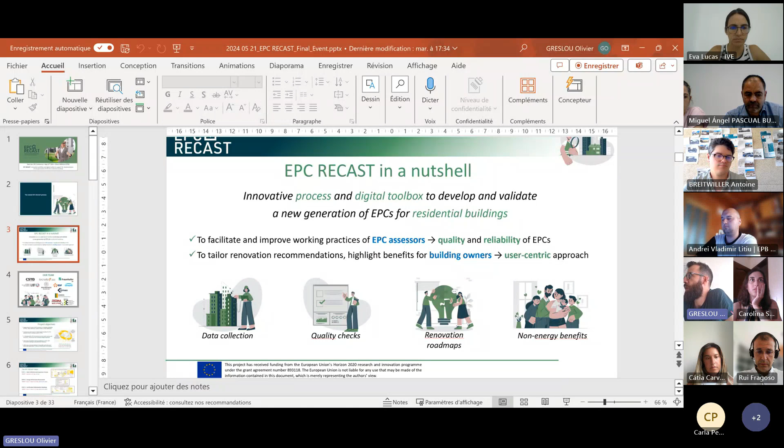Just to say that we were 11 partners. Some of them, I guess you know them. So we were with Tecnalia, Fraunhofer, energy companies in France, EDF&G, Polimi in Italy, Research Center List in Luxembourg. And we had EPB Center with Jana attending today, REHVA with Andrei, R2M, and BIMEO, a French company that developed a tool to do on-site visits of buildings.

So the project objective was to use novel methods like data collection and quality checks to improve the first step of the approach, which is the data collection on site. Second step, you have the energy performance assessment with the energy simulation back at the office, and then the certification where you issue the EPC and provide it to the owner. The idea was that the approach should last around 1 day as a maximum, with half a day of on-site work and then the other half day back at the office.

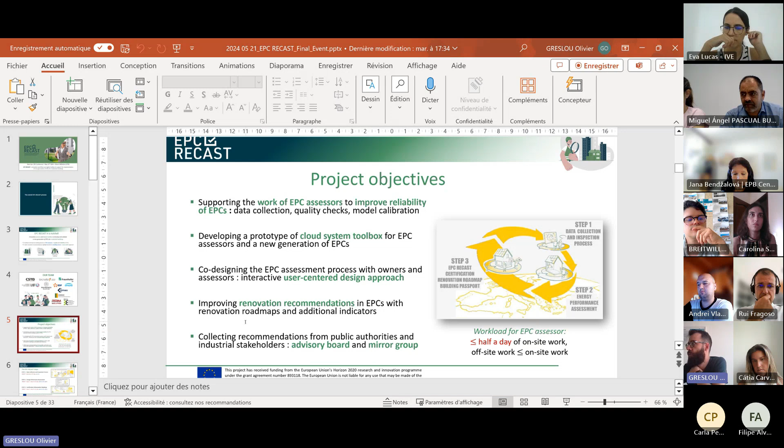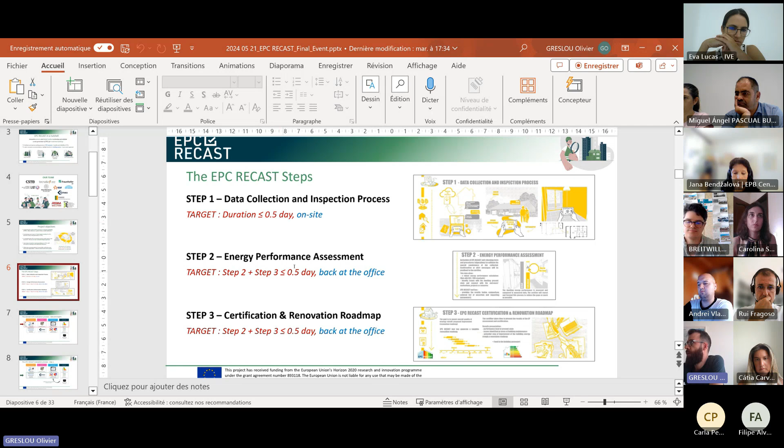So with the cloud system toolbox, I already said all of these things, and we had feedback from public authorities from different countries with the advisory board and the industry with the mirror group. So just to recall again the 3 steps. First one, data collection and inspection process, and then energy performance assessment, and certification and renovation roadmap.

So if I try to present the core process, what we did first on site was to use a tool developed on an iPad, on a tablet, that you use to scan the building. So I have several pictures of that here. So you detect the different walls inside the dwelling. Then it cross-checks the plans that it has detected, and it generates a BIM model of the building that you can see here. And you can then generate blueprints of each floor. So it can be used to get the right geometry of a dwelling from the inside.

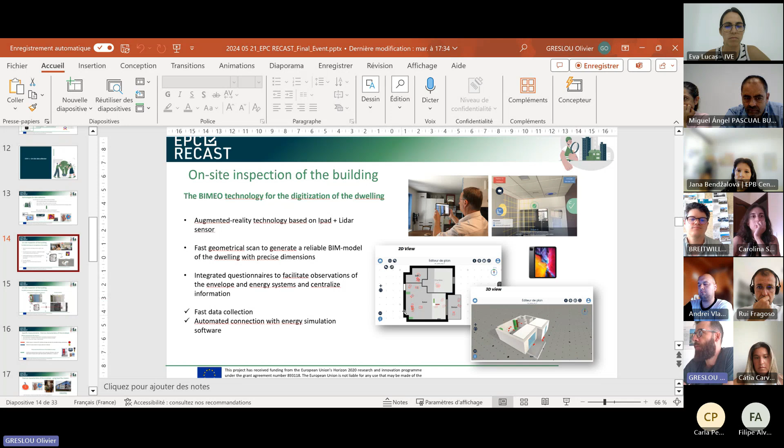You cannot scan a whole building with that, so it's not for multifamily buildings or non-residential buildings. It's just for single-family houses or flats inside multifamily buildings. But still, it helps to streamline the process and spend less time. You can also take pictures, annotate the blueprints you have in the app, answer questionnaires inside the app, so that you centralize all the data collection and observations about the building inside the same software and the same digital project.

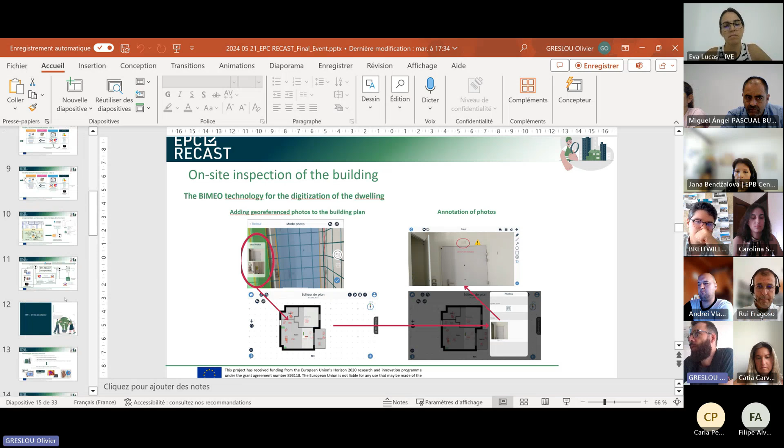We did other things, but I will not present them, like on-site measurements of thermal characteristics of the walls. The key central point is that once you have collected this information, it's stored into a simple digital logbook, which is based on a French technology developed by CSTB, the Kroqi technology, a platform where you can manage files and integrate different web services. But at the heart of this, you have an XML data model. So it's like an HTML file, which Antoine will present, which specifies all the information you have identified about all the building components, so the walls, the windows, the heating, HVAC systems, etc.

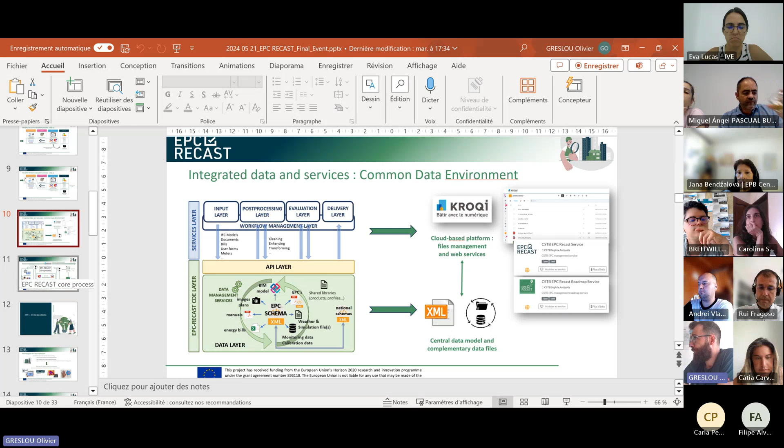In theory, this file could be connected to many things, to images, to bills, to databases, etc. We have not integrated all the connections in EPC RECAST, but that's something we are able to do at CSTB and that we could do in other contexts. So the data model is really at the heart of the project. And then, as you can see with the arrow, you store the information in this file. Then it's used, in some cases, for a model calibration. It was done by our colleagues at Tecnalia in Spain with EnergyPlus to evaluate some input parameters.

And then we developed a process that allows you to do dynamic energy simulation with a simulation engine that was developed at CSTB for new buildings.

Sorry, I just hear some background conversation.

Okay. So here is the process in more details. On the left side, you have the scans and measurements I talked about. So it's stored then in the end in this XML file, which is stored then on this web-based toolbox, which is a simple digital logbook.

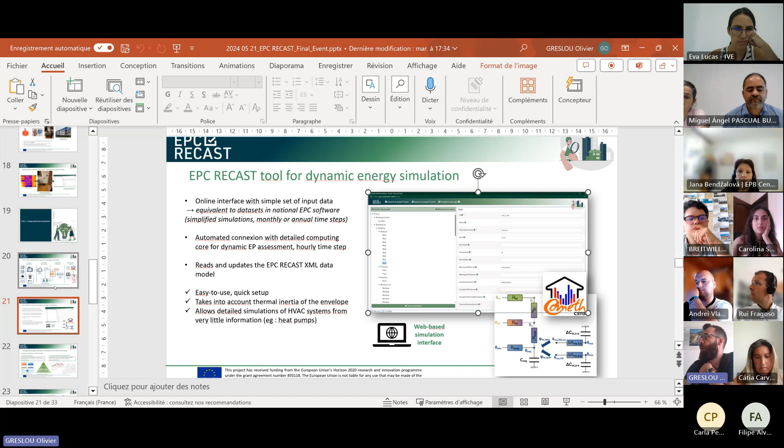And then we developed a simulation interface, which looks like that. It's close to an EPC software. It was just developed for the purpose of the project. We are not software providers at CSTB. It was just to do the test. And then you have conversion algorithms which convert this data set, which corresponds to what you're requesting today to an EPC assessor, into a more detailed data set that allows you to run a more detailed dynamic energy simulation.

So the point is that normally you do dynamic energy simulation with an engine like TRNSYS, EnergyPlus, COMETH, and other tools; it's rather for energy consultancy companies because it takes more time. You need to have better training to do that. And an EPC assessor is not trained enough to do dynamic simulation. So he has to collect the same amount of data as today, but then we do the conversion to transform this data set into a more complex one and to run the dynamic energy simulation.

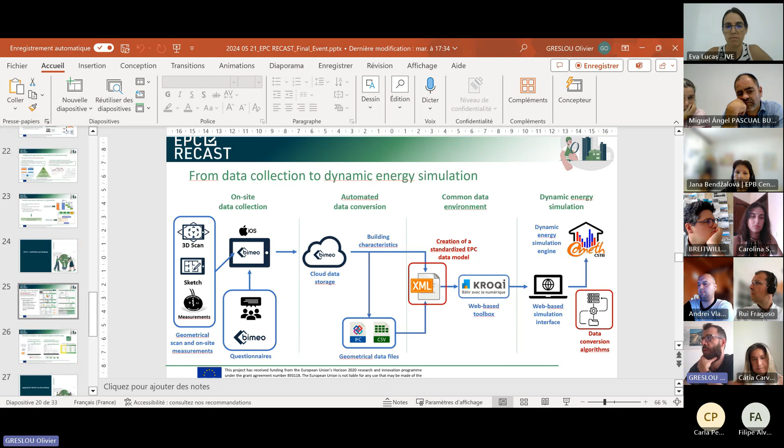And that's also connected closely to this data model, which is the entry point. And then we store the results from the dynamic energy simulation inside the data model. So that's what we did there, and it allows in the end to fill in an EPC template that was developed by Jana, who is today with us, which was closely related to the revision of the EPBD. So we monitored the evolution of the EPBD to define KPIs and information we should have as a minimum in this template. So this is how we did the process.

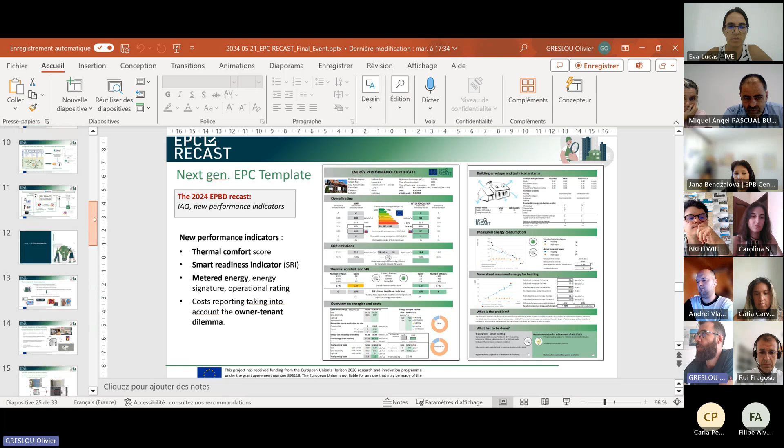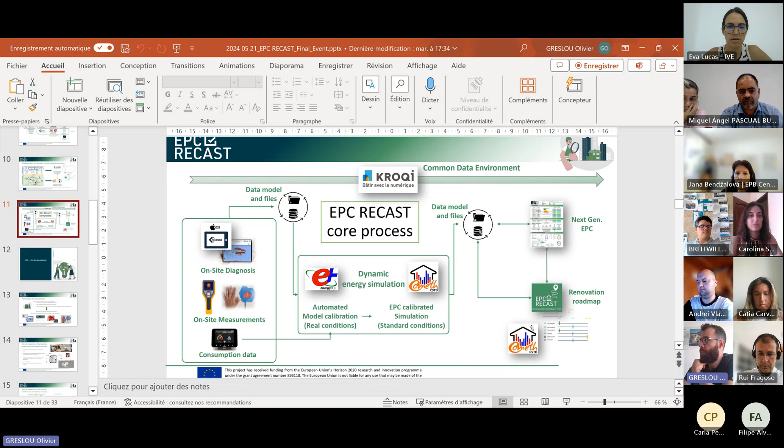So just to close on EPC RECAST. So in the end, you do the energy simulation, you store again the results into the data model, and from that you are able to have your next generation EPC. And we also implemented a renovation roadmap tool, a simple one that makes simplified renovation scenarios, which is also based on the data model of the building. So you read the data model, you have the current state of the building, then you define your renovation scenarios, you do the simulations, and you get the roadmap in the end.

So what we demonstrated in the project is that it was feasible to have an integrative digital workflow to improve the daily practices of EPC assessors with a common data model and a set of digital services. We proved it was possible to make interoperable different reporting and regulatory tools like renovation roadmaps, passports, EPCs, and other tools like national databases, even though we did not implement that, thanks to a common data model of the building.

So just to move to the final thing: to have an implementation in national markets, we do need IT development strategies from software providers who would provide such tools and digital workflows with professional software and interfaces to professionals. And we need data standardization of these data ecosystems and data models at the national scale and European scale to facilitate the development of tools that could better cooperate between themselves.

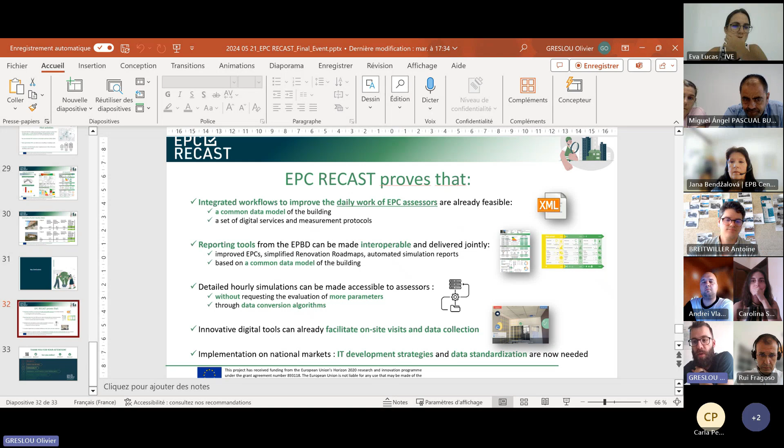So that was about EPC RECAST, but then I let Antoine share his screen and present elements about the French national database. Do you see my screen correctly?

Yes. Okay. So I will present you the French National Building Database, which is an initiative by CSTB to gather all information we have on buildings in a single IT object.

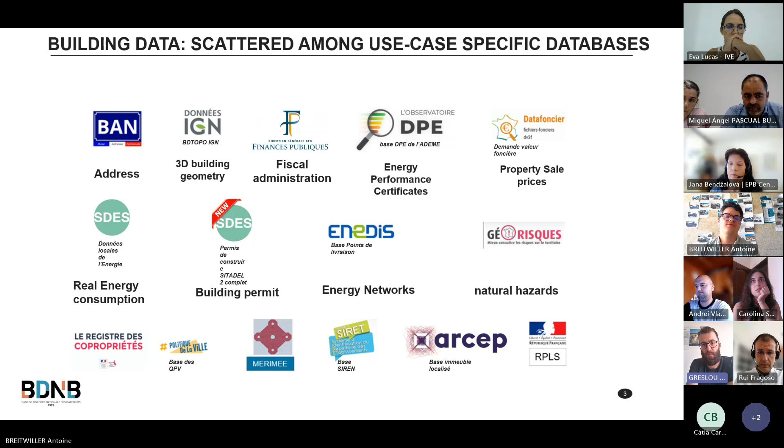So first, the state of building data in France before this was that we had a lot of building data, but they were scattered among use-case-specific databases. We had the fiscal administration with a lot of information on buildings. We had 3D building geometry. We had a lot of information on building permits, real energy consumption of buildings, but all this information was produced by different organisms, and they were not interoperable, which was the main difficulty to be able to do analysis of buildings on multiple indicators.

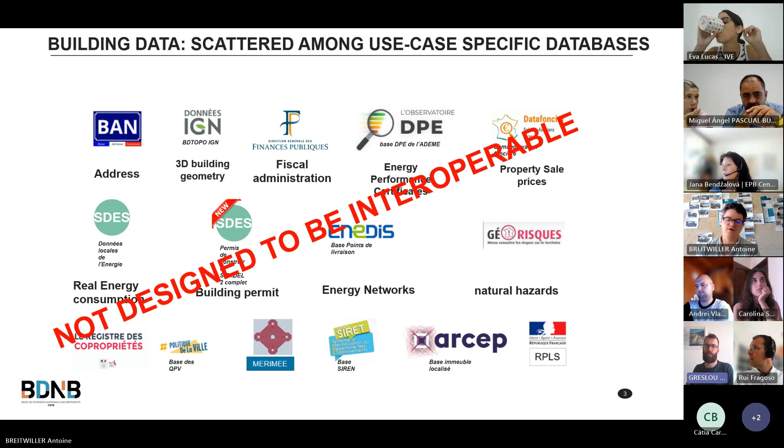If you have a specific use case, you can manage, but when you want to have a broader perspective on your building, you are blocked. So what we did is gather all these databases into one single object, which is the National Building Database, where we match data from all the sources.

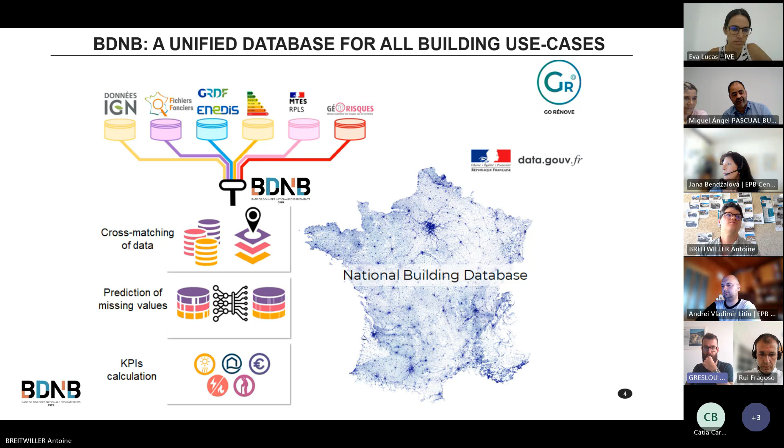We also have an approach of modelization and KPI calculation for buildings that need information, to be able to provide intelligence on the performance of buildings in France.

For that, we use a lot the French EPC database. But the French EPC database is incomplete at the moment. It covers around 25% of buildings, which is already huge, but not enough. So we've also developed methodologies to forecast and predict EPCs on buildings that need a proper EPC.

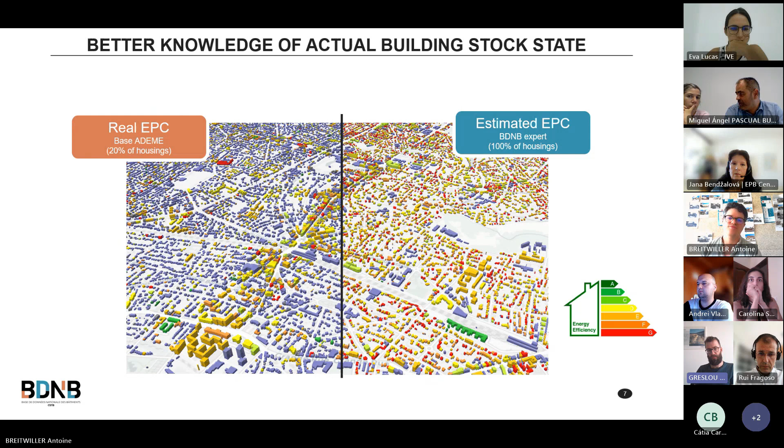With this, we are able to pilot public policies and analyze the French building stock. In this example, we identify that 20% of building houses correspond to 50% of the CO2 emission reduction if we renovate them heavily.

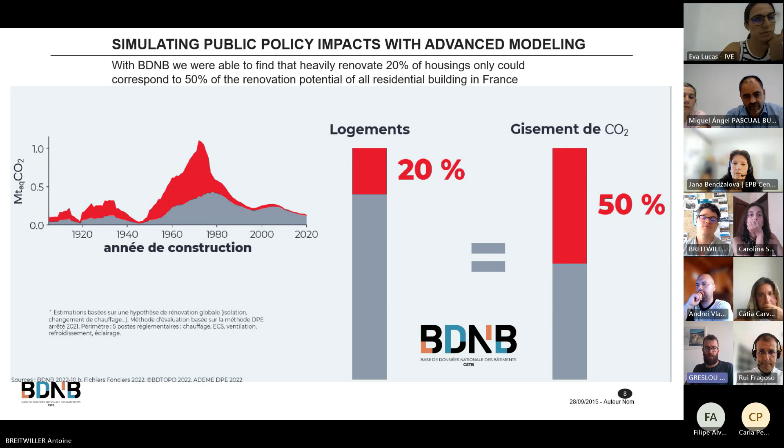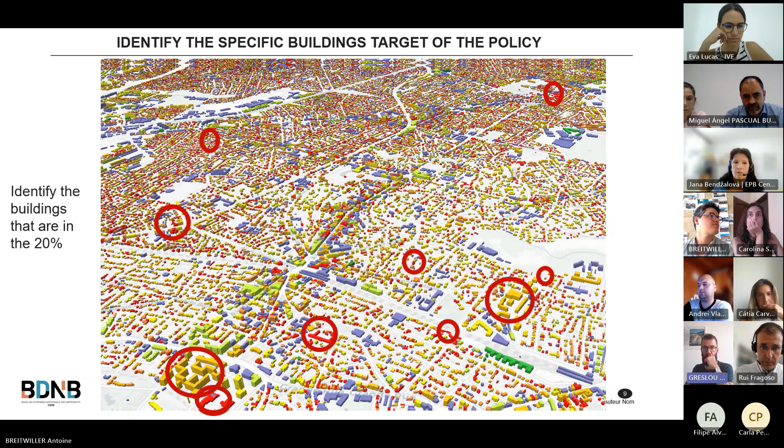The interesting thing with the BDNB is that you can compile those statistics and elements, but you can also localize specifically the buildings concerned. For example, if I want to identify the 20% of buildings to renovate to make this 50% CO2 economy, you can identify them on the map.

So that's one use of the French EPC data model that we do. And I will present what we have done with the French EPC data model.

This is from the new reform we had in 2021, which is an ambitious reform for the EPC in France, where we set up a lot of key aspects that are providing very good results at the moment, including an enforceable description and measurement of all the components of the buildings.

This means that if the information is wrong, it can be contested for a real estate transaction. For example, if a building is established to be insulated for walls, but it's not, then it can be contested, saying you are devaluating my building value. So this forces the assessor to fill in valid information.

The source of the information is explicit for each component, so you know if it's coming from a document, a measurement, or an observation. And for a document, you know which type of document was provided to give the information.

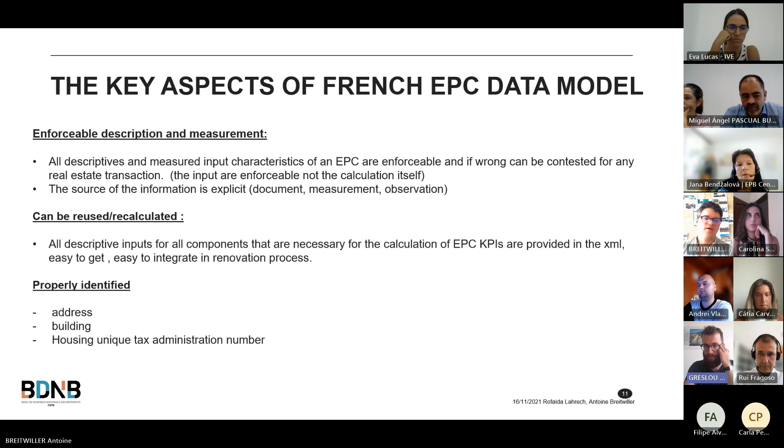Another aspect of this reform is that the number of EPCs sent is skyrocketing. Before the reform, the number was around 250,000 EPCs, and now we are around 800,000 EPCs per trimester. So it's huge, and with these numbers, we could cover like 50% of residential buildings in less than 3 or 4 years.

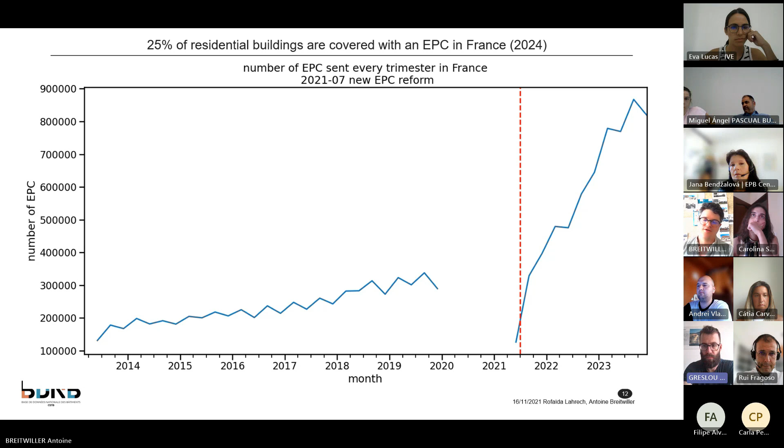Also, the EPC document, which is in XML, is sent to the French EPC database, but it's also validated and verified by an algorithm that checks a lot of the inputs provided. A lot of EPCs are rejected because they are provided with errors, so the provider has to supply a valid EPC that fulfills all the consistency checks.

For example, if you have forgotten to fill in the thermal bridges on a building, you will get an error. There are a lot of consistency checks running right now, so that all the EPCs stored in the database are checked for quality.

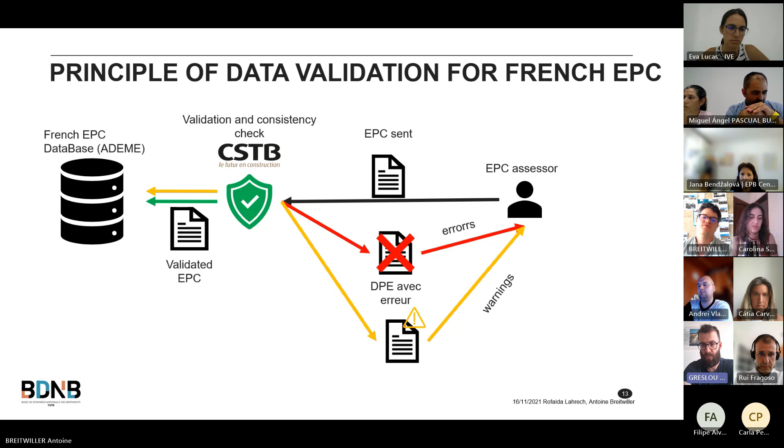So just to finish, for the EPC RECAST data model, we based it on the French EPC logics, which is to have a descriptive model for all its components. So the idea is not to have the numerical values as the first input for each component, but the property you can observe and measure, so that we have a model that can be shared with different modelization solutions, even if you have multiple simulation tools.

Then if you go back to what you can observe and measure on a building, you can, for example, as Olivier presented, use a dynamic simulation model, or you can still be on a static simulation model if you want. But it's very important to be at the descriptive level, not at the implementation level of a solution dedicated to one simulation tool. That's the approach we have in France, but also in EPC RECAST.

We have also made some improvements linked to European norms, especially for HVAC systems, because we have databases in Europe that have a lot of performance indicators for new systems. The idea is when you have new systems in EPC RECAST, you can link them to this European database. So that's it for the presentation of the French National Database, French EPC, and the link with EPC RECAST.

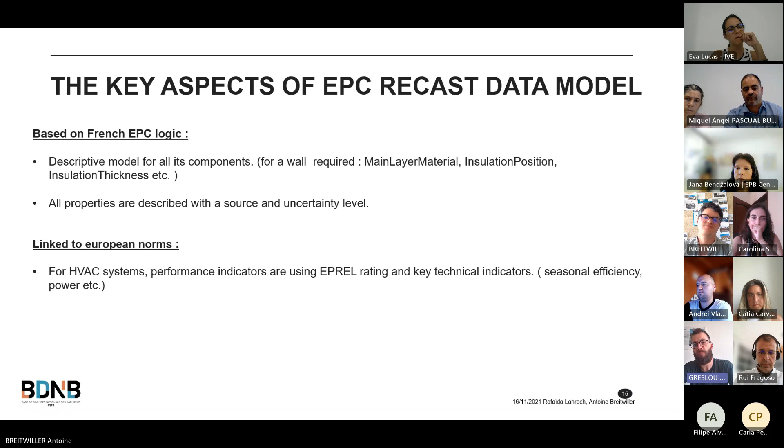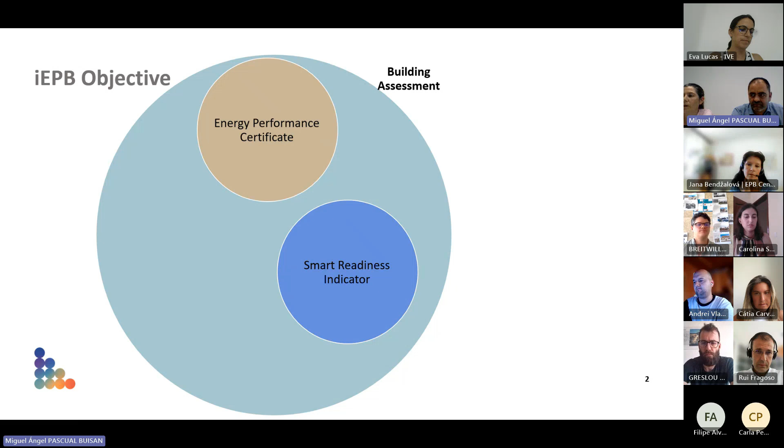In each of our countries, there are many assessments that our buildings must carry out and comply with. Some of these assessments are defined in the European directive, and others are defined by country or by the client's own wishes. For example, BREEAM, LEED, you know. But what is clear is that many of these assessments share data about the building with each other, and every time one of these assessments has to be carried out, a technician must collect the necessary data about the building in order to carry out the assessment.

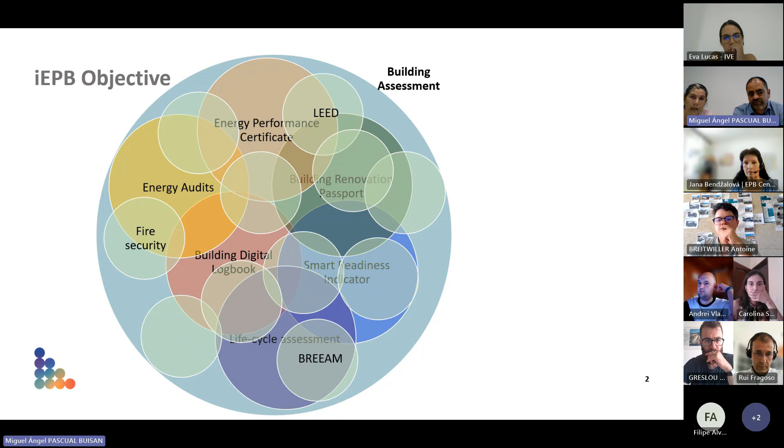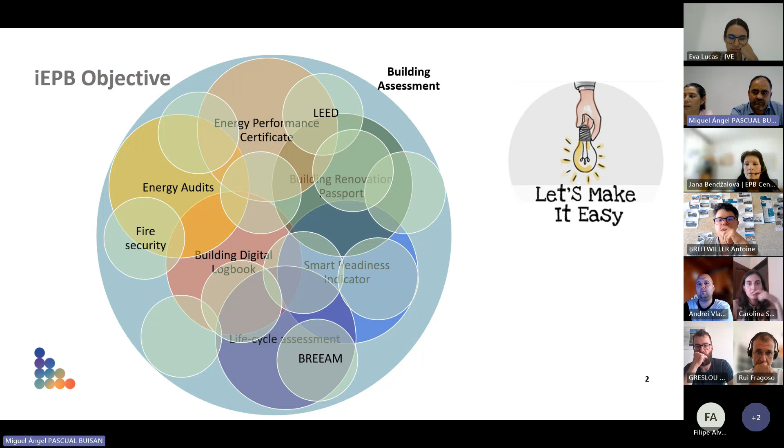This means a lot of duplicated work and in some cases even mistakes. Why don't we make it easier? That is the main objective of the iEPB project. The iEPB project aims to create a common data model for all building assessments, and this common data model will be the iEPB schema. This is the main objective of our project.

This allows common data to be shared between assessments. And when we talk about data sharing, we mean both input and output data, that is the results of the assessments. For example, the properties of a building, surfaces, constructions, materials, geometry, air conditioning systems, etc., could be reused from one assessment to another. So Miguel Ángel will explain what we are creating in the iEPB schema.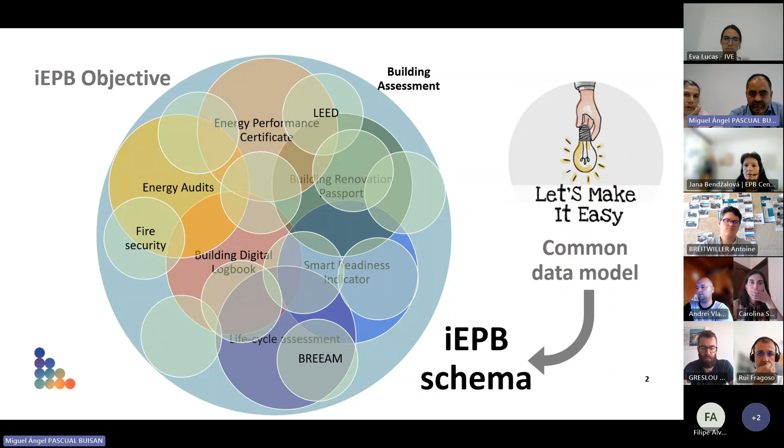When we thought about how we could get a common format for the different assessments we have related to EPBD, we thought, okay, we cannot create something new, we cannot reinvent the wheel. So we looked at what's already existing. For example, related to the energy assessment of the building, related to EPCs, related to energy audits, we have the Green Building schema.

This Green Building schema, or GBXML, is an already existing format for BEM models. This schema is founded by organizations such as the Energy Department of the United States, the Renewable Energy Laboratory, Autodesk, and so on. This schema is present in software like AutoCAD, Revit, and also SketchUp, and many other software are already using and exporting to this format.

And in relation to the life cycle global warming potential, that is another assessment that is going to be mandatory in future years, there is also an existing format, the International Reference Life Cycle Data System, that's the ILCD format. So if we are going to store information regarding the building simulation, or if we are going to store information for the global warming potential, we should reuse the existing formats that we have here.

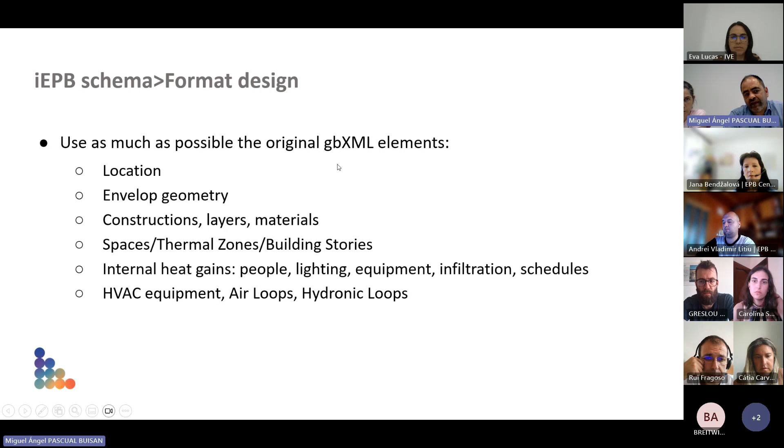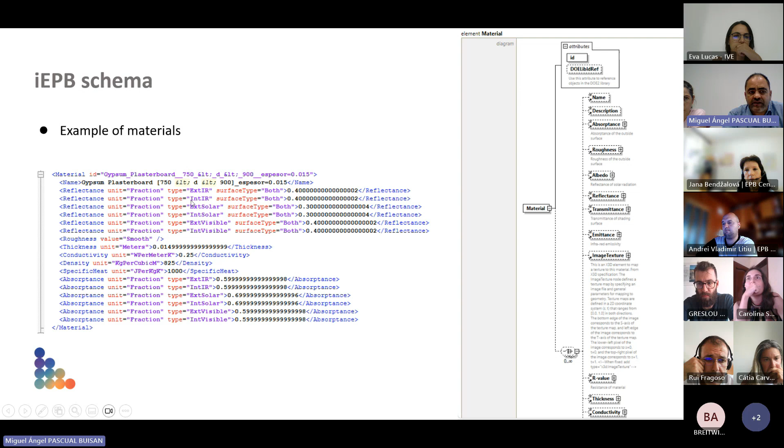This is an example of the information that can be stored in the GBXML file for a material, this is a drywall. As you can see, we can store all the physical properties that are required. Not all fields are mandatory, but if you have that information you can store it. So in the GBXML you will store information regarding the material, the construction, and so on.

But what happens with information that is not related, or cannot be properly allocated in the GBXML? That information should go to a specific file in order to keep it separated from the GBXML. For example, most of the information regarding the SRI should go to another, specific file.

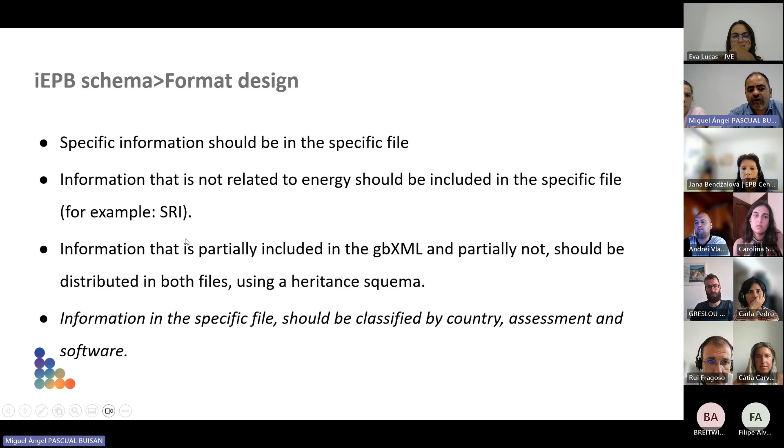We propose to start with an XML block for each country in the union. We propose to have a block for Spain, for the Netherlands, for Austria, and so on.

Then we propose to have a building data block inside the country block, because most of the time SRI, EPC, or life cycle global warming potential assessments are going to store information regarding, for example, the postal address of that building. That's information common to all the assessments that the EPBD requires.

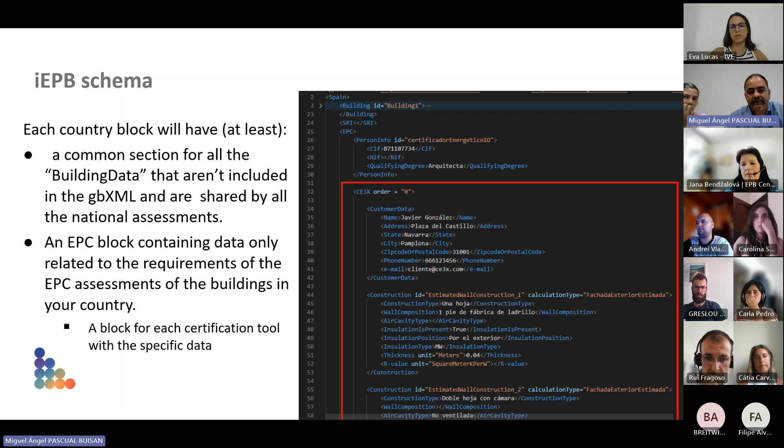I won't go into much detail, but we have a quite comprehensive building stock in Portugal, 3.5 million buildings, mostly single-family houses. Half of the people live in those single-family houses, in terms of households, which are 6 million. And by construction date, as in other countries, we have a lot of older buildings from before the 90s, which didn't have any requirements.

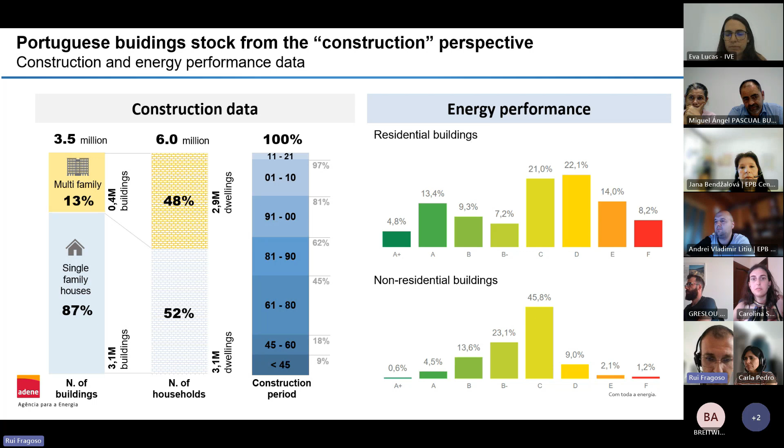Just a brief overview of the energy performance of residential and non-residential buildings. You can see a mixed distribution for residential, and very much a reference value for non-residential, as we already have MEPS implemented in Portugal that align with the C label. That's why you see many non-residential buildings being A+ to C.

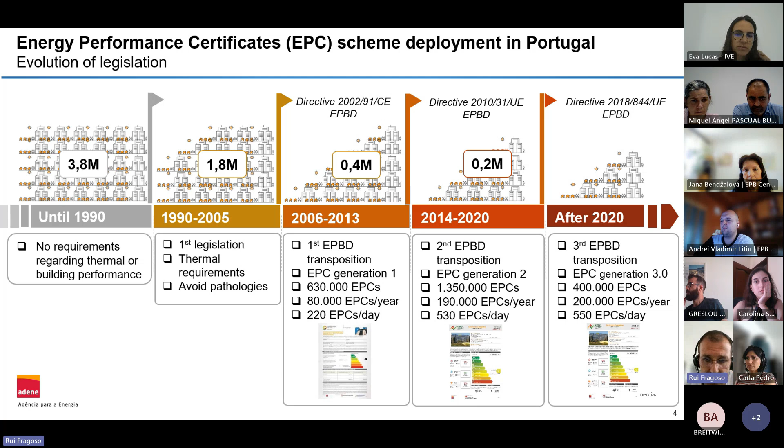This is just a brief overview of what's happened in terms of EPBD transpositions and the evolution of legislation. Perhaps I would just refer to the last column, where everything is more or less settled, with around 550 EPCs being issued every day, for around 200,000 EPCs a year.

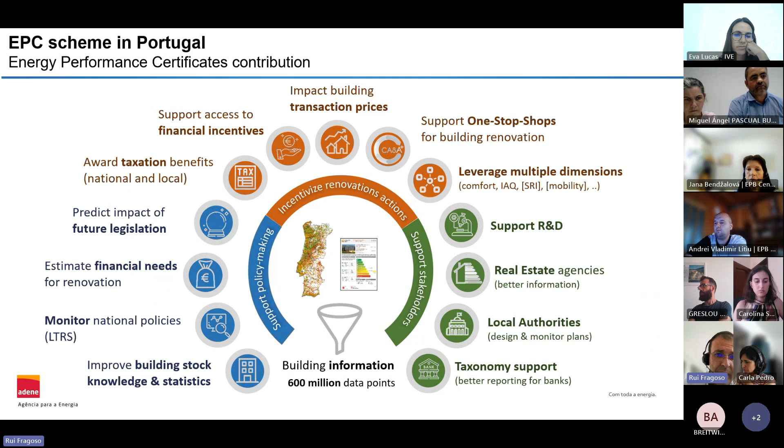Some experiences in using the EPC database. Actually, Andre has already referenced the ELISE. This is just pointing out the JRC technical report about the initiative of harmonizing data sets on EPCs, with some conclusions that the different EPC schemes make comparisons difficult. A harmonized EPC scheme would be very beneficial.

Also, regional energy agencies can actively support energy efficiency policies with these. As Andre also mentioned, this was based on existing initiatives in Italy and in Spain, and this methodology can be reused to go further in terms of this kind of harmonization.

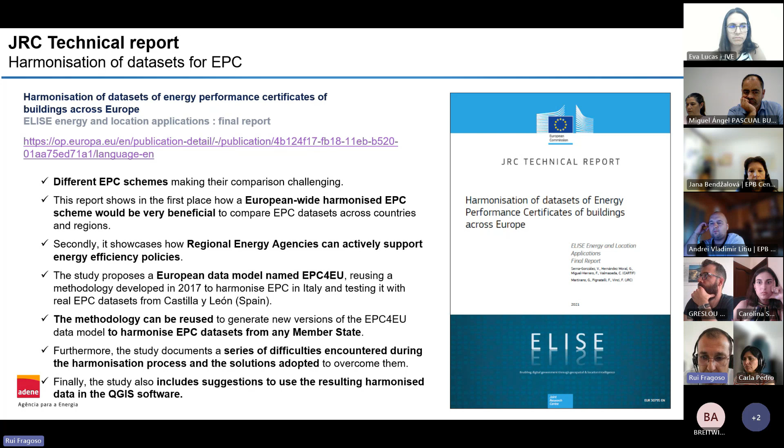So we see a lot of talk about harmonization in terms of data structures, potentially calculation approaches, etc. But there is nothing very concrete or widely used by member states at the moment, and I think that would be very beneficial.

Also, some information from the CA EPBD in terms of what kind of data is already collected in the EPC databases. As you know, this was not mandatory, but all member states except Germany, at least for a few years, I don't know if they have already set it up, I think they are trying to do it now, have EPC databases, and each one decided what data to collect. As you can see, most of the expected data is already included.

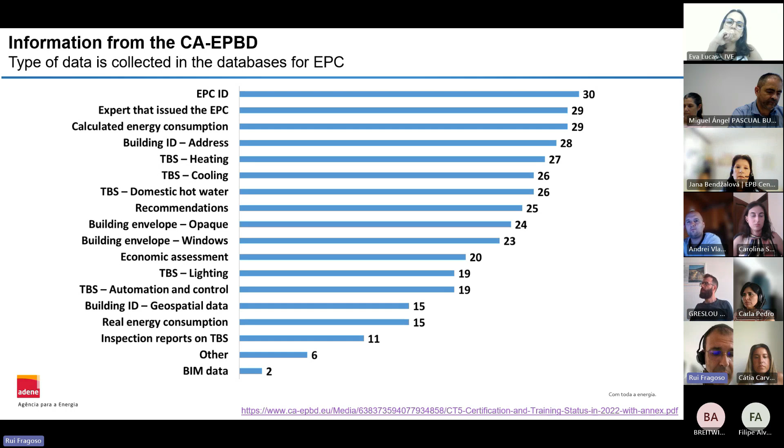So these 30 means countries/regions, because it also has some regions like Brussels, for example, but you can see a lot of data on buildings, on EPC IDs, on technical building systems, recommendations, building envelope, etc. And a little less on geospatial data, inspections, real energy consumption, and others. You can already see BIM data, which about 4 years ago was already being included in 2 databases.

So a little information about the variables and size of the databases. There's no harmonized approach here, as you can see. But on average, each EPC is collecting around 200 variables. The EPC databases are also quite different, taking into consideration the format of data they're collecting. Some of them are collecting PDFs, etc. Others just collect the data itself, then generate PDFs when needed.

And also interesting to see that each EPC has on average 1.5 megabytes of space, but it can roughly go from 0.3K to 14 megabytes.

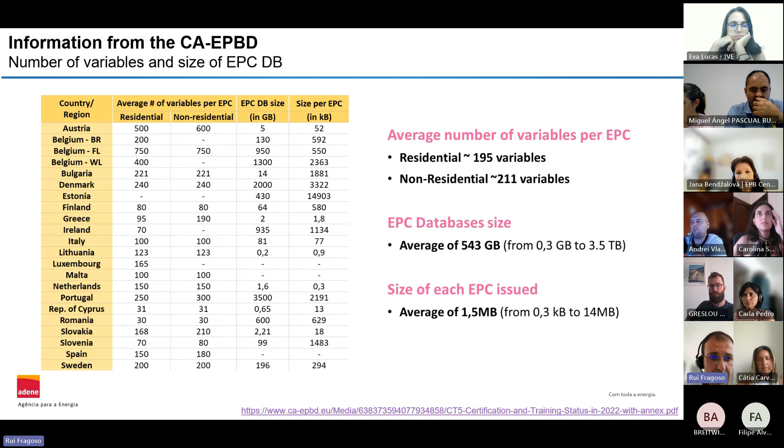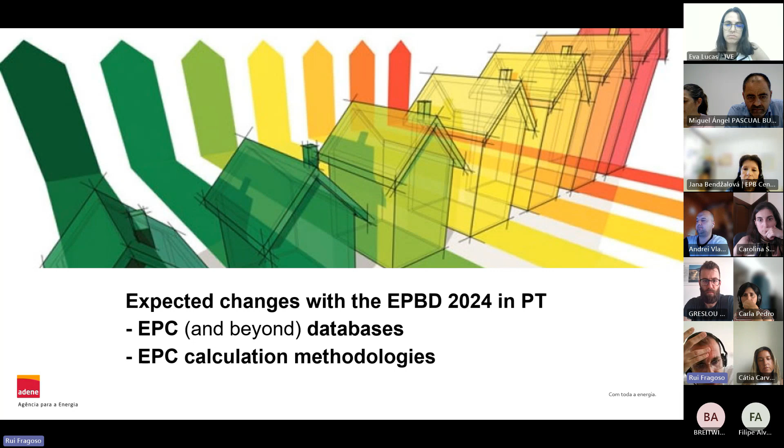So some expectations from our side. I would say there are two key topics now happening in Portugal: the EPC database restructure and the EPC calculation methodologies. I'll go very briefly over these two.

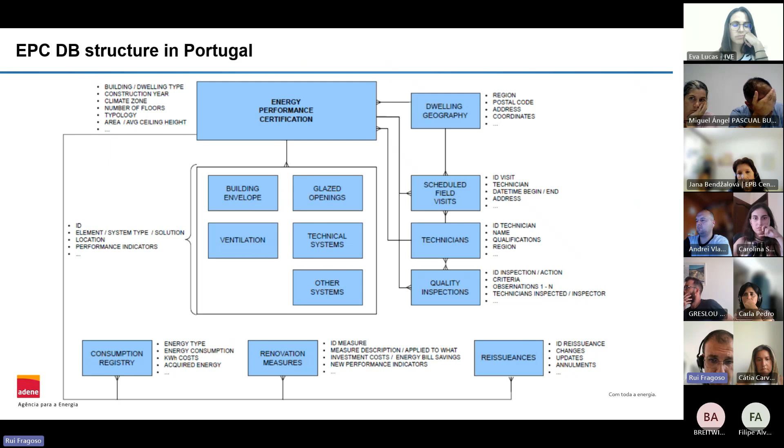So this is a simplified version of the EPC database structure that we have in Portugal. The energy performance certification has the biggest block, with the building, ventilation, glazing, technical systems and other systems being collected. Then we have modules for geography, for the dwellings, for the site visits, for technicians, for the experts, for quality assurance, and other modules like energy consumption, renovation measures, or the administrative module for EPC reissues, changes, updates, etc.

One of the things we started pushing a few years ago was having identifiers. In Portugal, we don't have a single building identifier that could be useful. So we tried an approach where, at building level or building unit level, we could develop or use identifiers useful specifically to arrange data and to interoperate data.

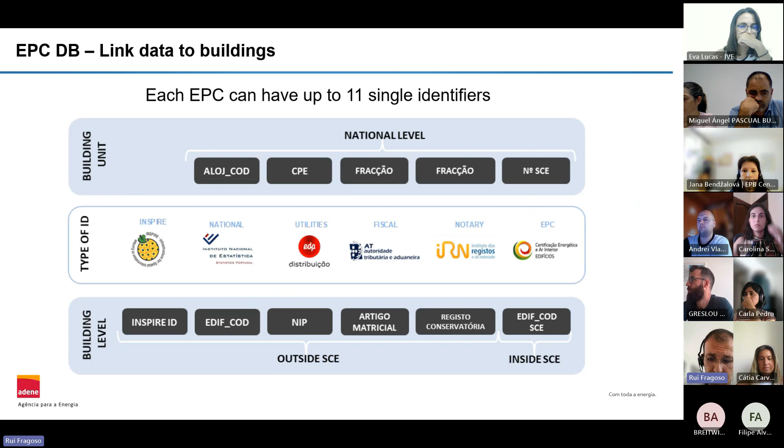So we have the INSPIRE ID, which Ray already mentioned at the beginning. Then we have Statistics Institute, utilities, fiscal, notary, and the whole EPC references that we use. This is just an example of how we are linking the data, basically through map services and web services with the National Statistics Institute, where we get access to that data. They also provide the linkage with the INSPIRE ID.

So since the Statistics Institute is the national authority for the implementation of the INSPIRE ID, this is good because it allows us also to integrate this INSPIRE ID already. And they also provide some census data. So it's interesting for the expert, when issuing an EPC, to already have some information about the census data and also the building structure. So you can see on the lower side, on the right side, the dwellings ID.

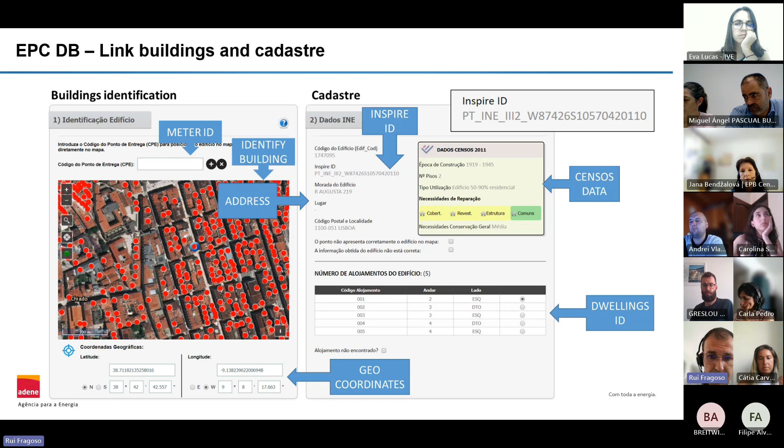So we also know that, okay, I'm doing an EPC for a single dwelling, but I can see also the whole structure of the building. And this is also interesting if we want to combine data for different dwellings and have the whole structure, the building structure, included. That's on databases.

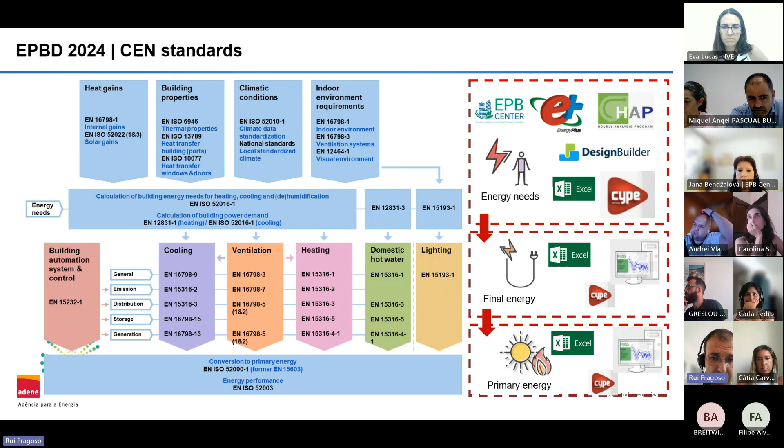Going on to the calculation methodologies, of course, it is a very well-known scheme of the standards. So we are very much looking at how to update it and how to use tools in order to go through the whole calculation process in terms of energy needs, final energy, and primary energy. Also, we had the chance to look a little at the approach that member states have on the EPBD. This is just a slide from a recent meeting in Athens, 2022.

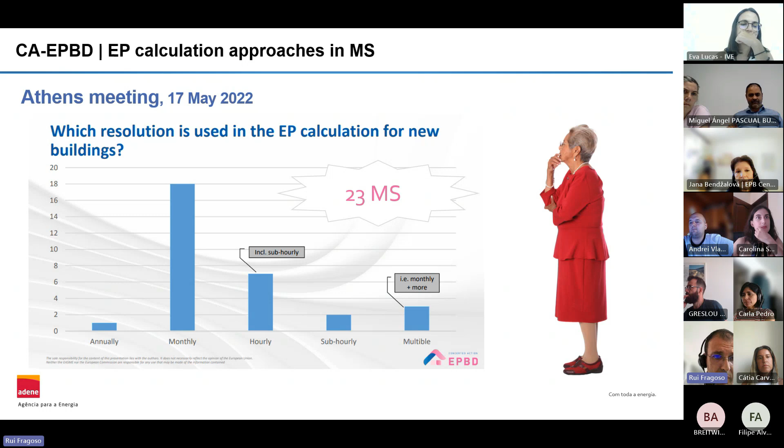And we can see that most of the member states, in terms of energy performance calculations, were using monthly calculation, but a good number already on hourly, sub-hourly, or multiple approaches, perhaps for different types of buildings, etc. And very few based on an annual approach. So what are we looking for? We still have an older approach, as I had a chance to discuss with Diana in Brussels recently.

So we still have an approach based on the ISO 13790 standard. So a seasonal calculation method, which is not even possible right now to use, with fixed internal gains, fixed 24-hour user profiles, equal distribution of consumption over 24 hours, and an energy performance of buildings calculated based on a ratio. So we don't have a specific value for each approach, we do a ratio approach, as a number of member states also do.

And we are looking forward to now implementing the new standards. We still see some Portuguese words there that were not correctly translated, but we are going through the new approaches, still deciding to go monthly or hourly. And we have seen, like Jana mentioned, that if we go for hourly, that perhaps provides us with other types of information that could give us more information about the building's performance, but of course it also might make it a little more complex, I would say, for existing buildings.

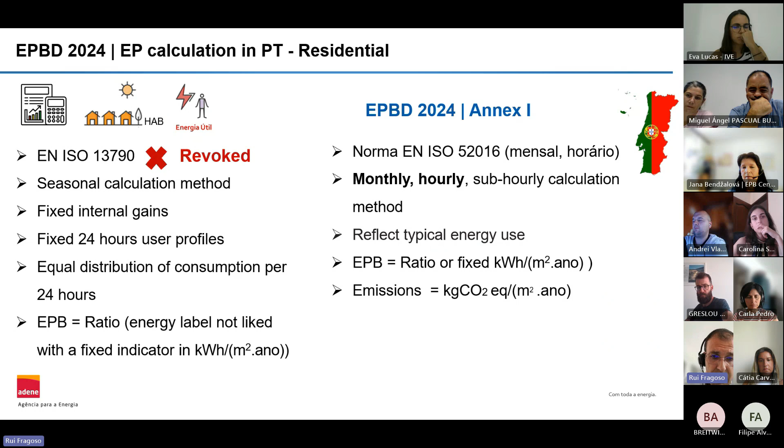So we'll have to reflect the typical energy use, and also reflect whether we stay with the ratio or try to implement fixed thresholds for the energy performance of buildings, and also include, which we already have, the emissions per building. On the big non-residential, I think we're better.

So we are based on the ASHRAE 140 standard with hourly calculation, internal gains calculated, real use profiles by typology, also distribution of hourly consumption depending on profile, and the EPB calculation is also based on the ratio. So I think the adaptation here will be easy to do for the non-residential. So coming to the last slide.

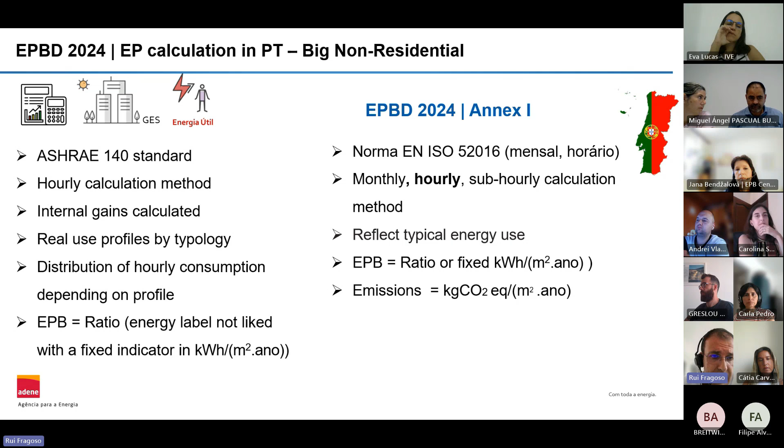So the current challenges we face for this specific purpose, I think, are two. For the database, it's to set up this new portal web interface and the buildings database to integrate all EPBD data, and on the calculation methodology, to update the current calculation methodology that we have and be able to store all EPC data in the new portal, as is more or less mandatory with the EPBD.

And so it was good for us to be able to integrate and make use of the deliverables that we have been discussing in this meeting, coming from the EPC cluster projects, to help overcome these challenges, and also make sure that everything we do in projects, and you know that ADENE has been involved in some of these projects, like the SRI-2-MARKET that was just referred to, doesn't get stored on a shelf where nobody uses it. So it's important to make use of these outcomes for the whole EU.

And I think that's also a little what Andre is trying to push in many initiatives, that is to make correct use of all the deliverables of the projects. And it's one of our expectations also with this meeting.